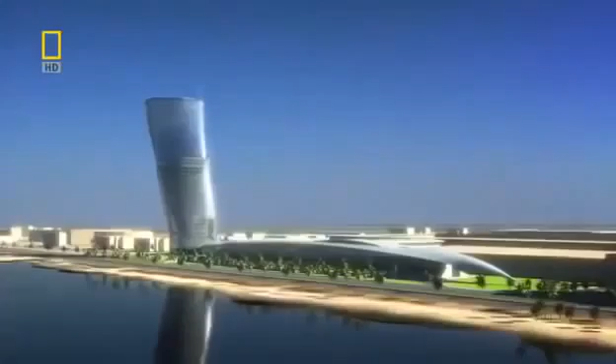The team come up with an extraordinary design. A tower that spirals out of the ground to 160 meters. Inspired by a desert whirlwind and the splash of a wave rising over the sand. This gravity-defying skyscraper tilts almost 5 times more than Italy's Leaning Tower of Pisa. No single angle of this tower is the same as another. It's a structure guaranteed to amaze.

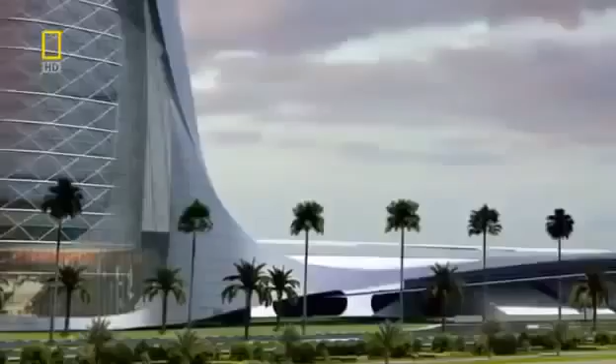We really wanted this to happen. They could see a vision suddenly. They could see something that would stand for them. Then there was no stopping us. Sheikh Sultan wants the lower floors to become the most prestigious office address in Abu Dhabi, with the top 18 levels assigned as a 5-star hotel fit for royalty.

But for maximum impact, this landmark skyscraper also needs a prestigious location. The Sheikh decides the tower will stand next to a monument of national importance, the Grandstand. Built by his uncle and founding father of the United Arab Emirates, Sheikh Zayed, it's used to this day for national celebrations. This monument and the skyscraper will link Abu Dhabi's future with its past.

Over the past 50 years, this land has experienced extreme change like no other. The discovery of huge oil reserves in 1958 set the wheels of progress in motion. Abu Dhabi's ruler, Sheikh Zayed, had a vision. To unify the sheikhdoms and secure their financial future from Western dominance. He then set about using his black gold to create a city that rose out of the desert.

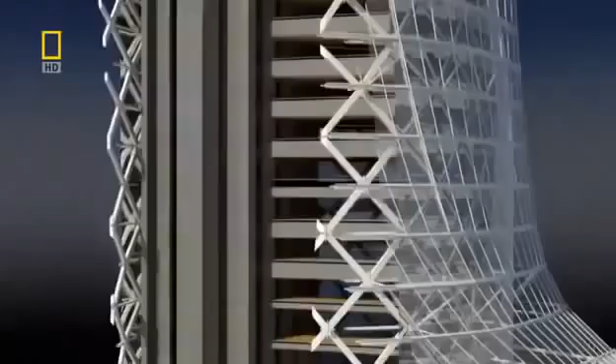To make Capital Gate's gravity-defying design a reality, it'll take some extraordinary engineering, and the challenge begins on day one. Its top floors overhang its base by 33 meters, creating huge forces that want to rip the building's foundations out of the ground.

At the construction site, project architect Tony Archibald is daunted by the task ahead. When I first joined the job, I was shown the drawings, and I kind of did a double take, and I wasn't quite sure that I got the correct understanding of the project, and it took me a few moments before I realized what we were about to undertake.

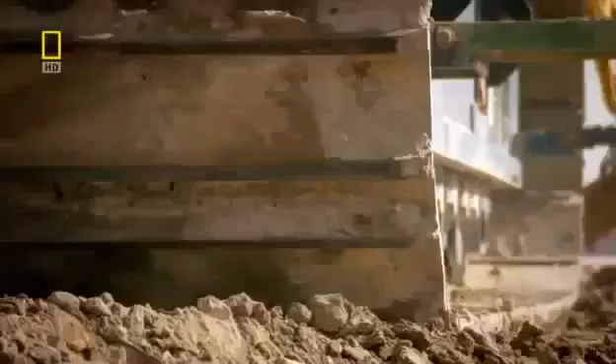Keeping Capital Gate upright is a huge engineering challenge. There isn't just one solution. To overcome the forces of gravity, it will take a whole range of pioneering techniques. But the task starts with the foundations, deep underground. On one side of the building, the weight is going down into the ground. On the other side, it's being lifted out of the ground. And that's due to the large overhang that we're having to deal with.

The solution requires almost 400 concrete piles that work in two different ways. On the leaning side, half of the piles push the overhang's forces into the ground. On the opposite side, the remaining piles anchor deeper into the bedrock. They resist the stretching forces trying to wrench the building out of the ground.

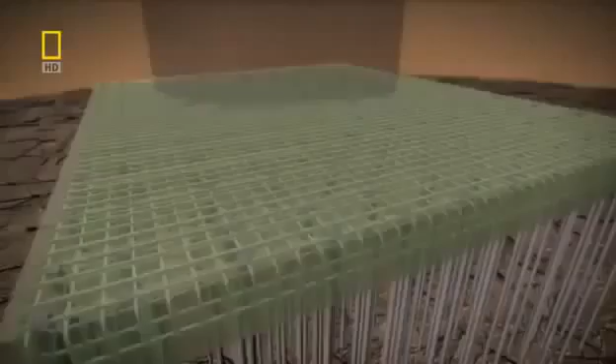Finally, to evenly distribute Capital Gate's forces into the piles, a deep concrete slab reinforced with steel is laid on top. What the foundations taught us is that every single aspect of this building has to be custom engineered.

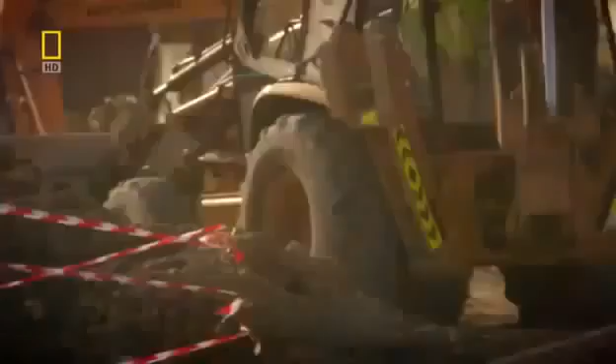Excavators dig out a colossal 6,000 cubic meters of sand. And over 8 weeks, hundreds of piles are driven into the ground. We had an awful lot of piles to put in very close proximity. It was a real difficult challenge. There can be no let-up on this schedule. Sheikh Sultan wants Capital Gate complete by an impossibly tight deadline.

In less than 2 years' time, Abu Dhabi will host the World Future Energy Summit. Over 3,000 delegates from 50 countries and the world's press will convene at the neighboring Abu Dhabi National Exhibition Centre. It's the perfect opportunity to showcase Capital Gate and prove Abu Dhabi is at the forefront of innovation.

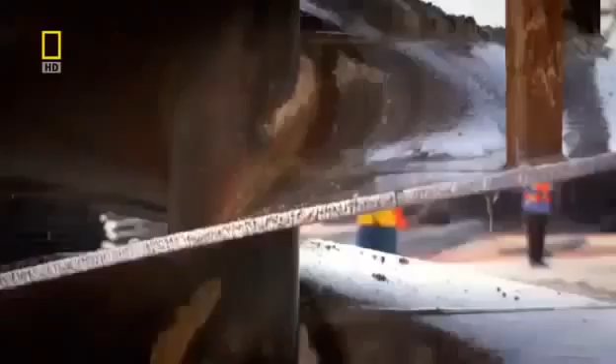But this gives the team just 24 months to design and build a unique skyscraper. With the foundations finished, building above ground can begin. But because of the dramatic lean, it will have to be constructed in a very different way to a conventional skyscraper. We realized once we'd done the foundations that this was going to be the first of many difficult problems.

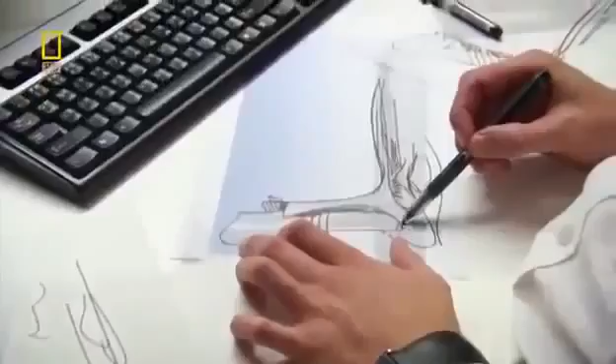A normal skyscraper requires a solid core to hold it upright. But Capital Gate's curves would just crack and topple a standard core. Engineers must discard conventional thinking and devise a way to defy gravity. Inspired by the nearby desert landscape and its wind-shaped dunes, architects have designed a curved leaning tower. But it'll take some audacious engineering to stop Capital Gate from falling over.

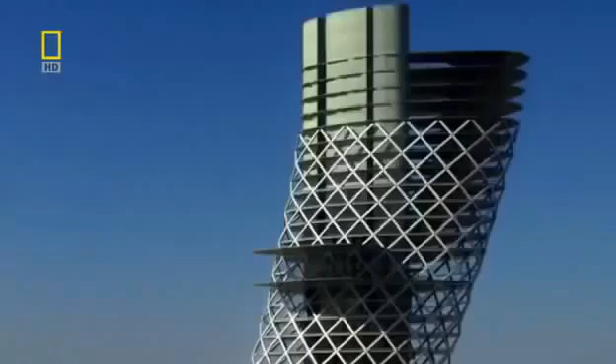Normal skyscrapers are built around a slim vertical core, which helps to channel the building's weight into the ground. There's so much overhang on this building that a conventional core was no way going to work. You just can't build a straight core. It's just not strong enough. Capital Gate's design would cause a conventional core to bend dangerously. The pull of the massive overhang wants to stretch the core on one side, causing the concrete to tear apart.

Structural engineer Mona Vassi knows it's a serious problem that must be solved. When I saw this one, I thought it's impossible, it's not going to work. It's just some sketch somebody left somewhere. But I always think that for the architects, it's easier for them to just draw something, but it's not easy for us to fulfill or satisfy their needs.

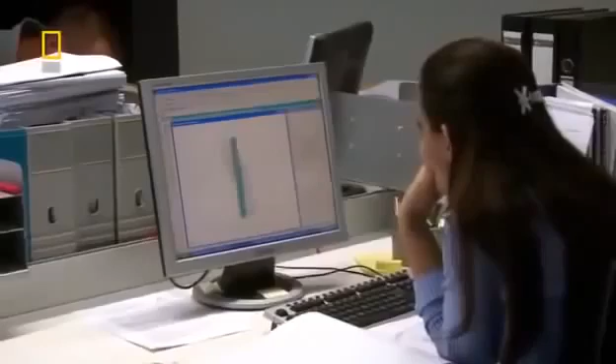The engineers developed two groundbreaking solutions. The first part of their plan is to build the core with a curve, bending in the opposite direction to the building's lean. As the structure grows, its weight pulls the core straight. In total, it shifts 350 millimeters, and the effect is significant. The concrete that would have been stretched by the overhang's pull will now be compressed and strengthened.

You build it bent, and then as you add the slabs to the upper levels, it pulls it back into vertical. So basically that whole vertical core is in compression, and that gives it immense strength.

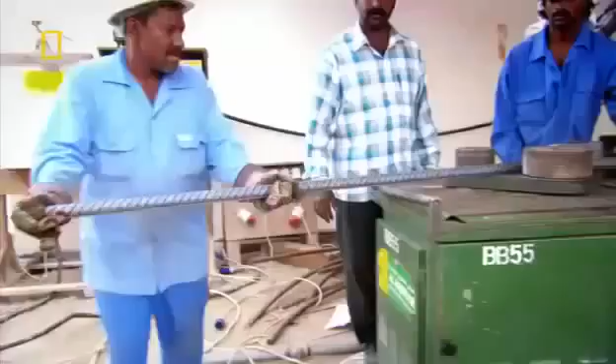The core grows 4 meters a week, and construction manager Les Fairchild is in charge of building it. This is probably the most complex core that I've come across. It's built at an angle, and effectively the core holds the whole building up. The core is built using a technique called jump forming.

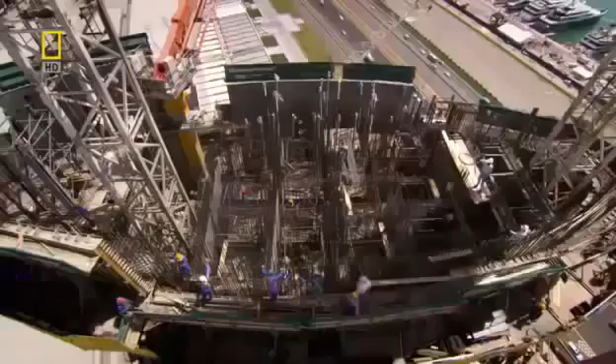First, a dense mesh of steel reinforcement is assembled. A mold then closes around the steel to form the shape of the core. The steel mesh is then filled with concrete. Then the mold or form can climb up the core wall for the process to start all over again. Jump form is a hydraulic platform. Once we've cast each 4-metre level, we simply attach it to some runners and we jump it hydraulically up to the next level.

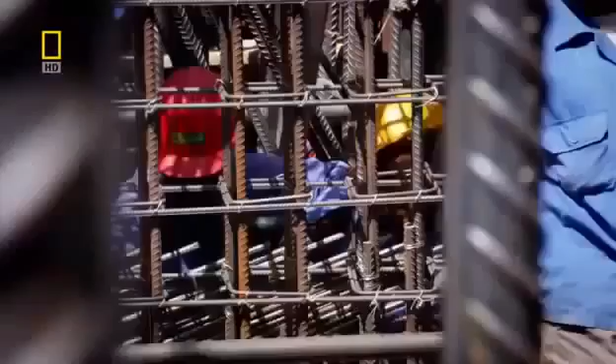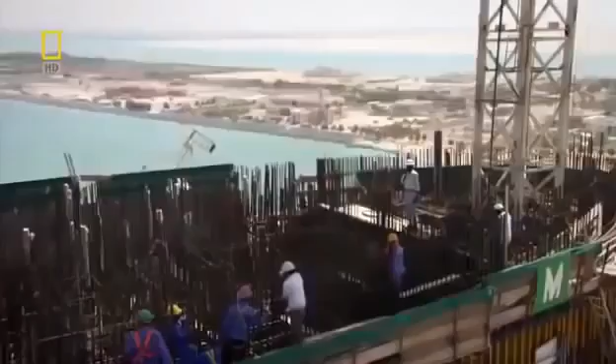The core will be strengthened as it straightens. But for the core to carry extreme loads, the concrete must be reinforced using steel rods called rebar. The rebar is installed during the daytime, but temperatures of up to 50 degrees Celsius and concrete don't mix. It dries too fast and could crack. To set at the right speed, the concrete has to be poured during the cool of the night.

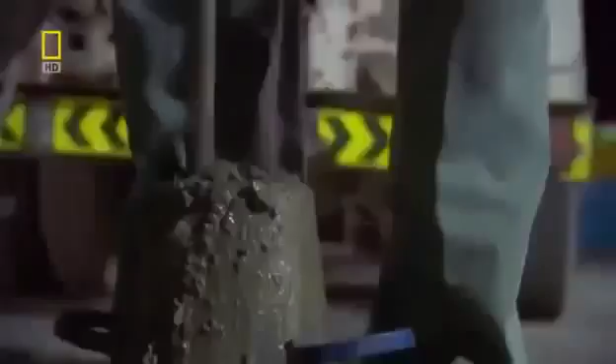As the core grows higher, the liquid concrete has to be pumped over longer and longer distances. So the consistency of every batch is first checked in a slump test to ensure it won't block the pipes. When you first see it coming out the wagon, you can usually tell whether it's a tight mix or whether it's a loose mix, and that's what we're testing for really in the slump test. We simply make a cone, lift the cone off, and depending on how much it reduces in height, tells you exactly what the slump is. The one we just witnessed is 215 millimetres, which is within the specification, so that's good to go.

Whilst the truck drives to the pump, Fairchild needs to get onto the core. He can take the stairs, but 90 meters up is a long climb. He knows a much faster way. Crane lift.

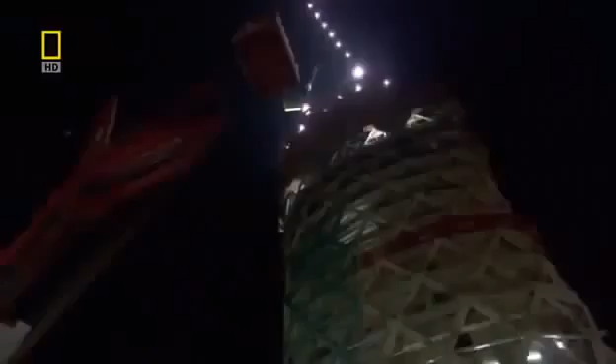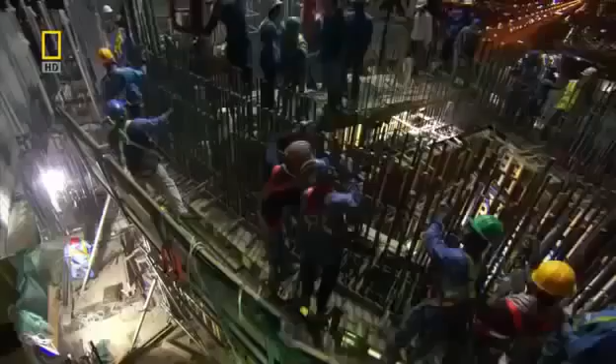It's going fairly well. We've had a nice continuous supply of concrete, and we're now pumping it up to the upper levels of the building. And the lads are just steadily working away. They actually work from one side to the other in metre deep layers, so they're doing everything right. It's always exciting when we pour concrete. It means it's another achievement really. We're going up another level.

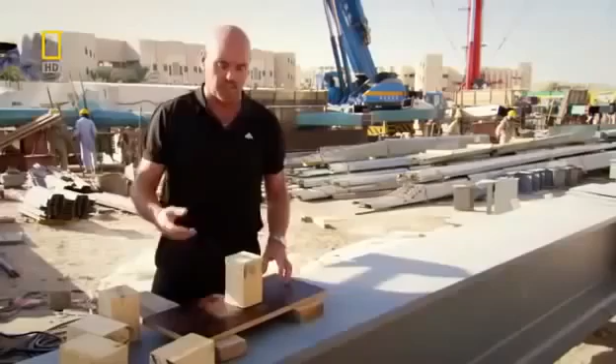But building the core out of alignment and packing it with rebar still isn't enough to stop gravity toppling Capital Gate. What we came up with is a post-tensioning solution where we introduced much more reinforcement into the core wall and then used the tensioning process. Basically that was done by introducing high tensile strands to the centre of the walls.

When we reach the designated height, we simply apply tension. We're actually stretching the tendons that fall through the wall, and we're actually pulling them tight, and that's done by a tensioning machine. So effectively when the tension is complete, when the load was applied, the core would stay intact, and the additional reinforcement would prevent it from falling over.

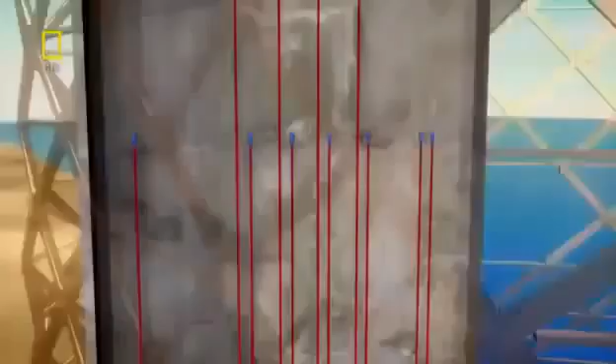To post-tension the core, 146 steel tendons are threaded vertically through the concrete. Each tendon is 20 meters long and runs through 5 floors of the building, overlapping each other for maximum strength. When the tendons are stretched, the stress counteracts the pulling force created by the massive overhang, stopping the concrete from tearing apart.

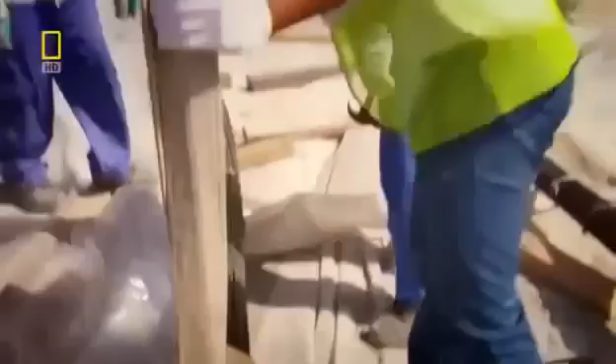On site, the team are post-tensioning the core, but no one has ever attempted this vertically in a skyscraper. The long tendon is lifted to the top of the core. The team used the steel tendon's weight to force it through a duct already cast through the core. Once the tendon is in position, the team lock off both ends, ready to tension its individual strands.

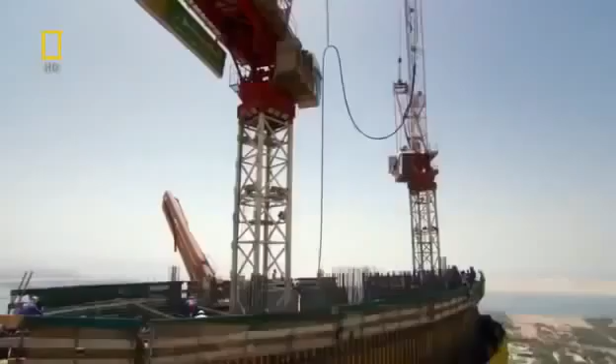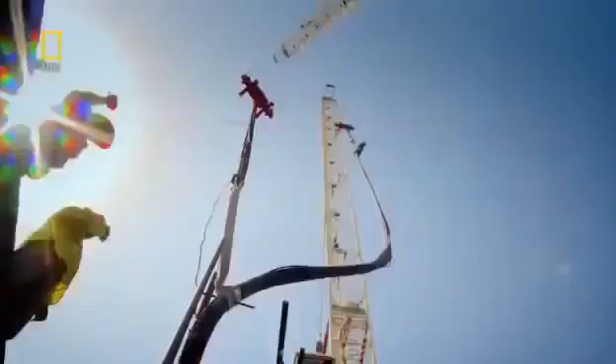A pneumatic jack clamps around one strand at a time and stretches it. It's equivalent to about 5 family cars pulling on one end of the rope. With the steel tendon now stretched to the right stress level, concrete pouring can continue upwards. The quantity of cable that's been used is approximately 120 tons and 120,000 metres in length. It's about 44 times the Golden Gate Bridge. This process is repeated over and over and means the core should withstand the huge loads generated by Capital Gate's extreme overhang.

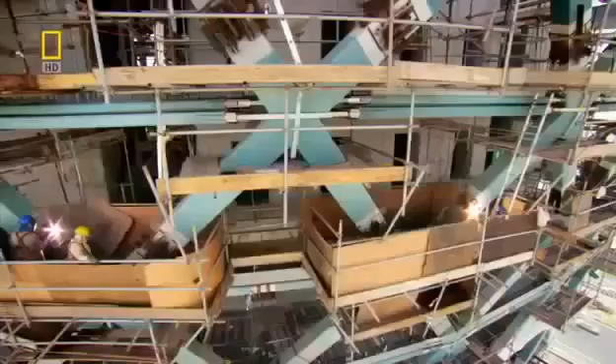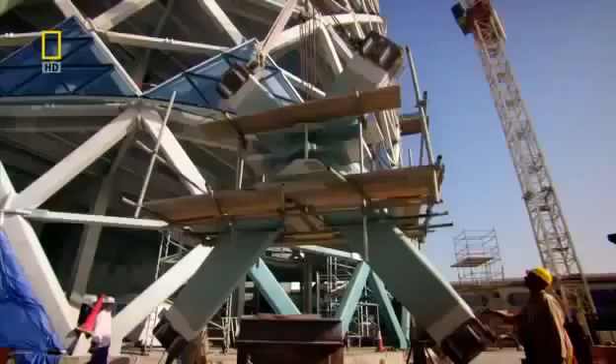But now, an even greater challenge must be tackled. The building's twisting, leaning design must somehow be turned from theory into reality. And once again, it'll mean bending the rules of architecture. To create Abu Dhabi's architectural icon, Capital Gate needs an exterior curved leaning frame. But once again, the building's extreme tilt creates a problem.

The shape of the building with this very pronounced overhang meant that traditional skyscraper building solutions just weren't going to work. There's no way. The building design requires it to be thin to maximize floor space and allow for huge panoramic windows. Irfan Ahmed is one of the engineers who has to find a solution. For structural engineers, it's always challenging to accept the architectural requirement, you know. They always want thinner and thinner and thinner.

Surprisingly, the humble chicken could help with this engineering dilemma. It is essentially a skin of structure around the outside of the building, not unlike an egg. An egg can withstand huge loads because it evenly distributes forces down through its shell, which means the shell can be thin, creating more space inside. So it's very, very thin, it's very, very strong. If I try to crush this egg, you can see that it's actually amazingly resilient. So let's see how resilient.

Here I have 170 eggs laid out, and we're going to put load on top of these in the form of breeze blocks. Moment of truth. So far, so good. Each one of these blocks weighs 15 kilos. So we've nearly got half the weight of a car on here now, on our 170 eggs. Let's see how far we can push this.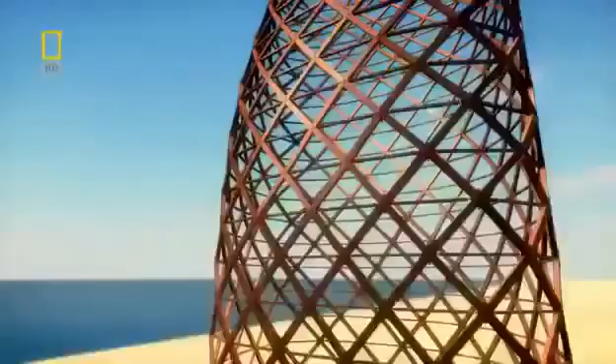A diagrid is a giant mesh of steel that wraps around the core. Steel beams connect to a node or joint to form a cruciform section. 720 uniquely shaped sections link together to form the thin but immensely strong diagrid. Working together, these cruciforms equally distribute the forces down the outside of the building. The way it does that is by making a uniform net, so that the forces are very evenly distributed, and that means that we can get away with slenderer sections.

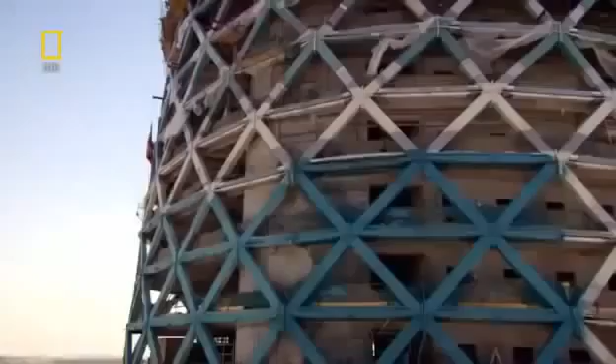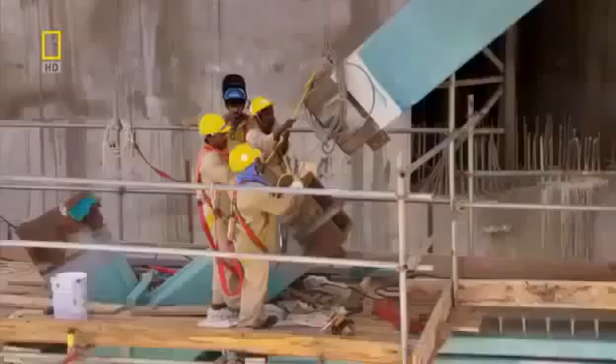On site, a team of 240 steel fabricators assemble the diagrid. They've built the easier straight part of Capital Gate's base, but now the structure is starting to lean, making installation even more challenging. Each cruciform, weighing up to 16 tons, has a unique geometry and must be crane lifted at a precise angle. If the diagrid is not assembled with millimeter accuracy, the mesh will not channel the loads and the structure could be weakened.

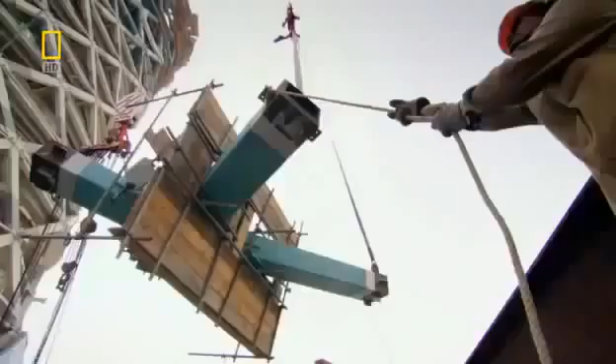The engineers must communicate closely with the expert steel fabricators. They design and manufacture the diagrid 150 kilometers away in the neighboring emirate, Sharjah. Here, cutting-edge construction is the norm. They've built one of Malaysia's Petronas Towers and Dubai's iconic skyscrapers, the Burj Al Arab and the Burj Khalifa. But Capital Gate's revolutionary design pushes even these experts to the limit.

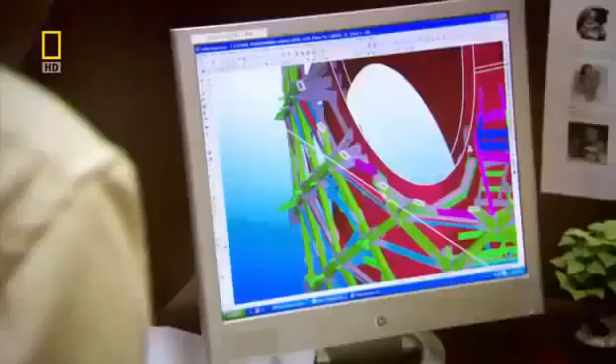On the planning floor, project engineer P. Bhaskaran and his team need bespoke 3D software to tackle the building's highly complex diagrid. The 3D modeling is done, and any unforeseen criticalities will be very clearly identified in the 3D model. Each one of the 720 cruciforms is precision engineered, not only to channel huge forces, but to connect with millimeter accuracy to the neighboring cruciforms and the glass facade.

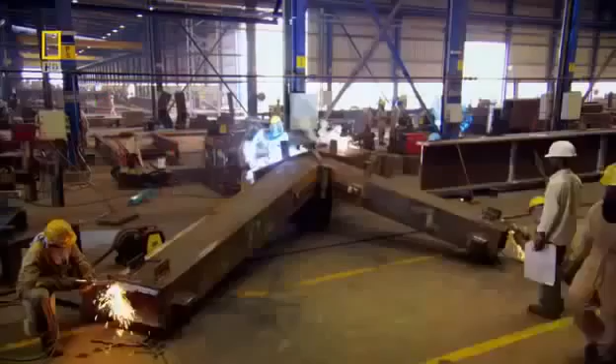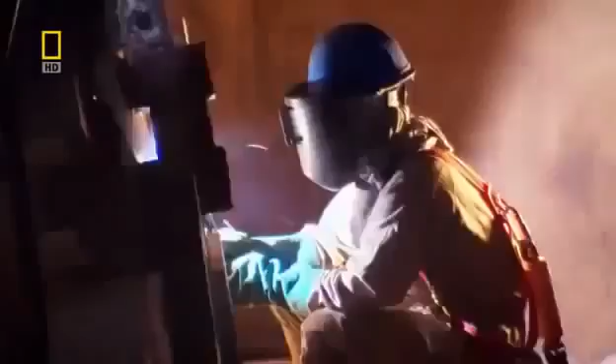But to measure their exact angles, the team used some old school technology, chalk. It might look unsophisticated, but it's highly accurate, ensuring all the elements will join together. To keep up with construction, the factory must produce 18 cruciforms every week. Constructing such a huge building, a critical building within the short span, without working 24 hours, it is absolutely not going to happen. As the skyscraper reaches new heights, the long hours start to pay off.

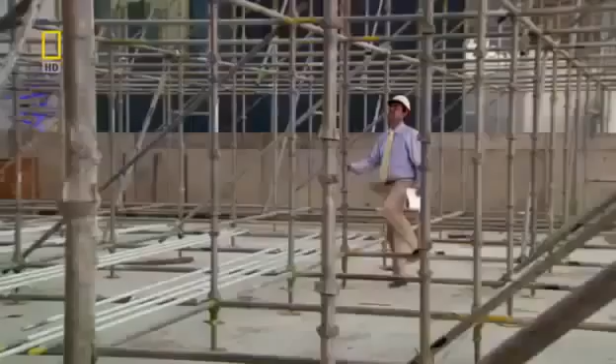This design pushes the diagrid technology to its absolute limit, and in fact far beyond what's ever been achieved so far. Even in your dreams, you're thinking about this project. So once you see the structure coming up, you forget all the long hours you spend and all the sleepless nights. A colossus is fast emerging from the Abu Dhabi sands. Now, this leaning tower must be clad with a glass facade. And as always with this gravity-defying structure, it's going to require some revolutionary engineering.

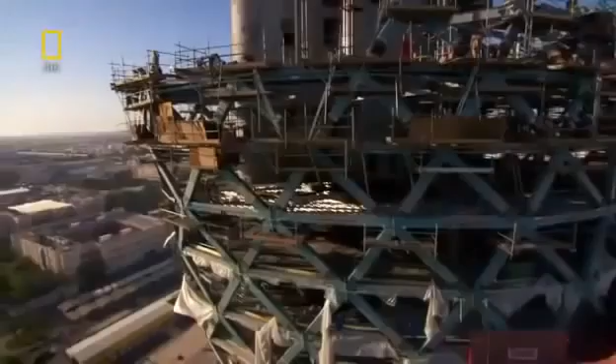Glazing Capital Gate's leaning curved frame is a major problem. Covering its unusual contours with curved glass will blow the budget. So the skyscraper's curves must somehow be clad using cost-effective flat glass panes. Fortunately, ancient Greek geometry can help.

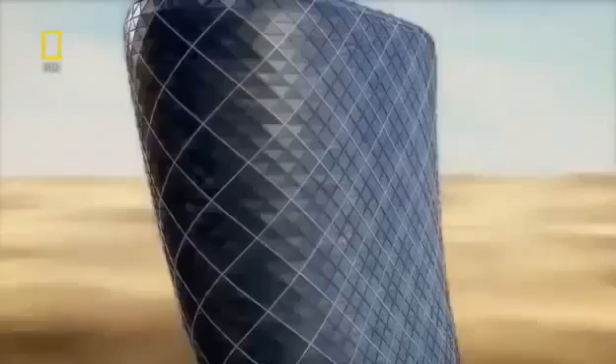Because you've got a complex shape, it's an organic shape, it's a curved shape, the only way to model that with straight lines is to use triangles. Triangular panes can pivot in 3 directions, and when joined together can cover complex geometric surfaces. But because every angle of the building is unique, it'll take 26,000 triangular panes to form the facade.

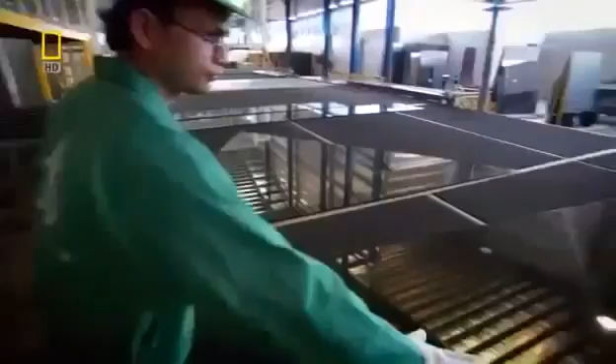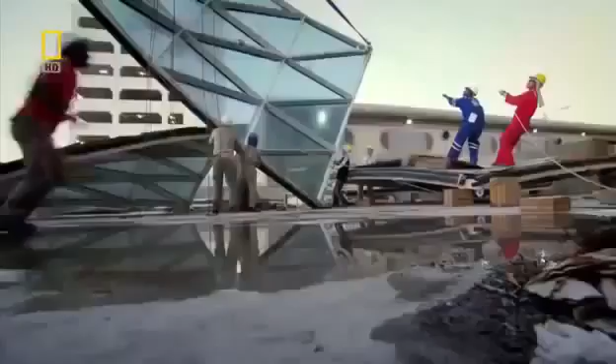With so many glass triangles to cut, the local glass factory springs into action. Each pane is scored by an automated diamond cutter to an exact pattern. The triangles are then sent along the production line. The team is under constant pressure to deliver enough glass to the site. Hey, this side, you guys, hold it. After several weeks, 8 diamonds are in place and another 100 standing by.

But the glass design is so unconventional, it still has to pass a number of tests to prove it's up to the job. Because we'd already started the glass installation, the results of this test were absolutely key. Each panel is stacked one upon the other. So if we'd had any kind of problem, we would have had to unstack them, which would have had disastrous consequences for the program.

This is no ordinary glass skin after all. Capital Gate's core straightens as it grows. The skyscraper will not stop moving until after completion. Normal glass facades can accommodate minute movements caused by wind and temperature changes. But to stop the glass shattering and keep the building watertight, the panels must be designed to shift by up to 20 millimeters. The scale of that kind of movement is almost unheard of in glazing systems. It's a vast amount of movement.

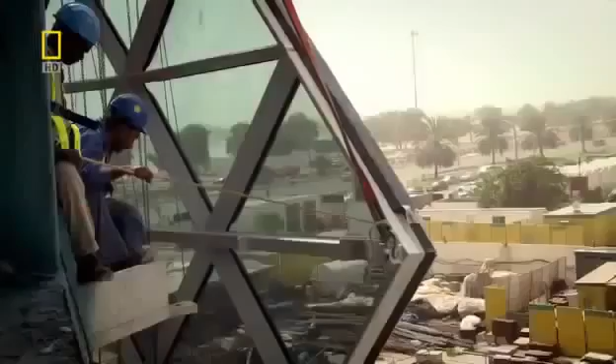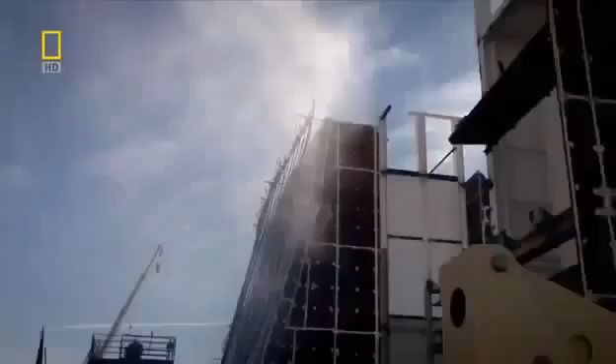With glass installation ongoing, construction manager Craig Rooney needs to know the panels will perform. We don't want to get to the top, we've done it, we've installed it, we think we've done a great job, and then it all leaks. The panels must be tested to the limit at a Dubai laboratory. A plane engine and many litres of water simulate worst-case scenario weather. Now the moment of truth. Any leaks could be a disaster.

And it's bad news. The first time we got a full water test, we had a leak. The fact that we had a leak was devastating to the whole team and very alarming. The diamonds connect to each other by a bespoke two-layer seal. The flexible spongy seal allows the diamonds to move and keeps water out. But if any water does seep through the outer seal, drainage tubes fitted at intervals let the water flow away.

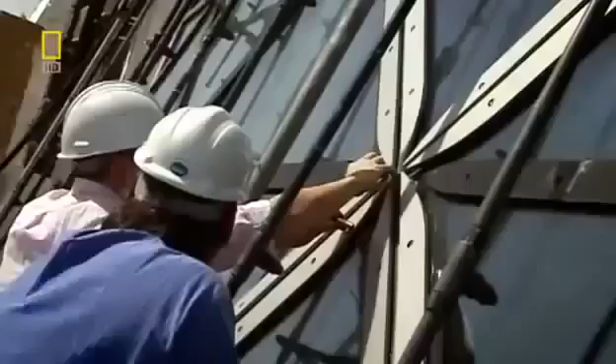The panel has failed the test. Water has flooded inside and penetrated the inner seal. If it was a fundamental failure, we're back to the drawing board, so the cost and the budget and the program all go completely out the window. The panel is examined. Answers are needed fast. Fortunately, it's not a design failure. They discover a drainage tube is only blocked with sand. The problem resolved, installation can step up a gear.

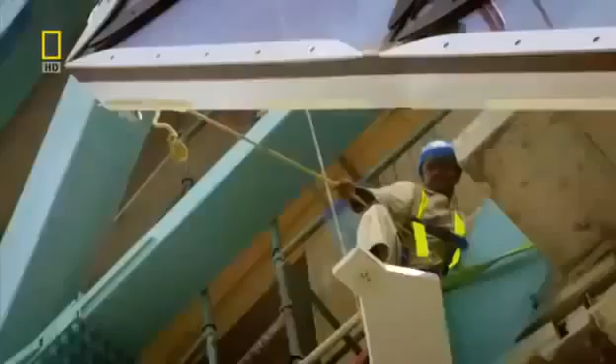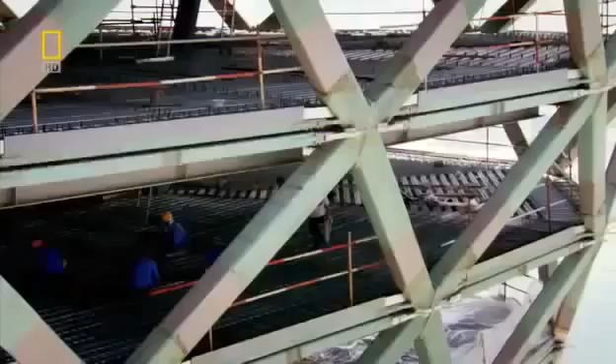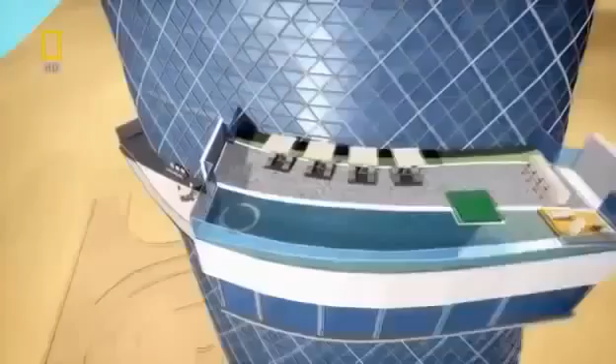But as always with this audacious building, one problem is solved and another is just around the corner. To give Capital Gate's five-star hotel lobby the wow factor, architects again plan to push the design to the extreme. Now they want to build an infinity pool and a restaurant, hanging 100 meters above the ground.

18 months into the build, Capital Gate's design is about to give a new slant on high-rise living. The architects want a pool deck and restaurant suspended in the sky, but it's an engineering headache. There's so many requirements that architects have that really put us in so much trouble as engineers, but you want to make sure you have a safe structure. The design calls for a two-story extension, hanging without any visible support. But the pool's water alone will weigh 150 tons.

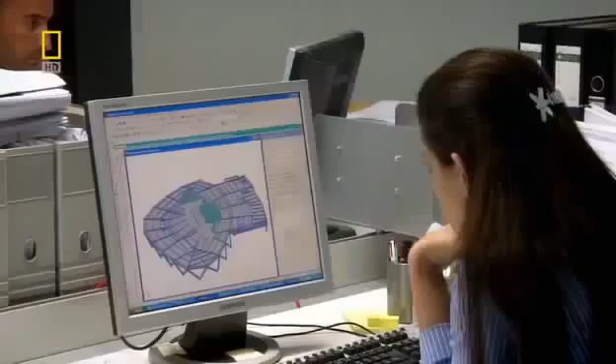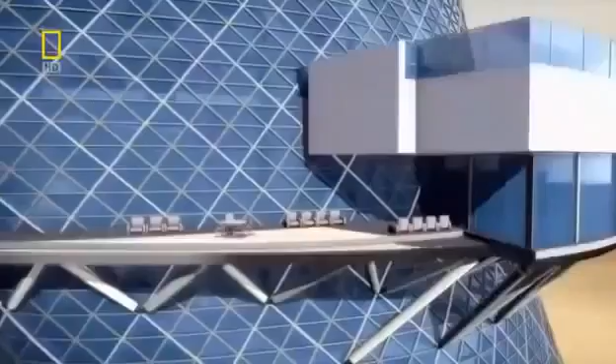The structure's huge mass means it needs reinforcement. We needed some supports from below, otherwise there was no other solution. I don't think you can have a cantilever that huge on this building, no way. The design will only work if it's underpinned with 22 steel struts. They will carry the loads back into the building. But the struts must also look delicate to meet the architect's aesthetic demands.

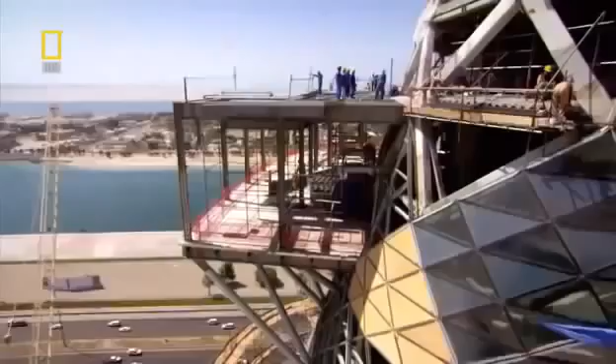On the construction site, 90 meters up, the pool and restaurant is taking shape. All of its structural elements are in position, except one. The team are raising its last 6-ton floor beam.

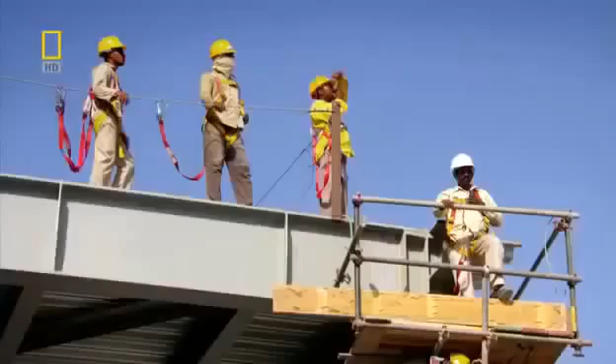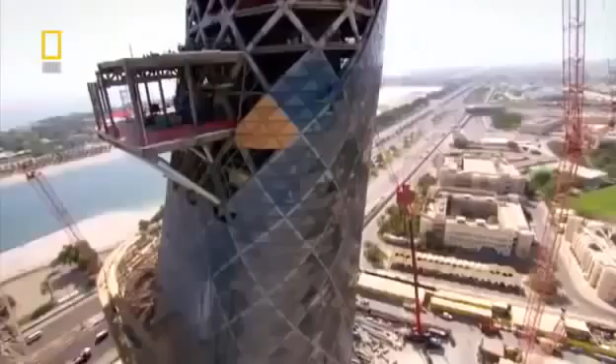The idea behind these junctions is that they behave like the insects that can walk on water. They're sufficiently light that the surface tension keeps them above the water. So these little brackets dissipate the forces from all that weight.

Capital Gate is fast becoming an Abu Dhabi landmark. But the taller it gets, the more the weight of its upper floors is a problem. The skyscraper needs to go on a diet. And this time, the architects come up with a clever solution.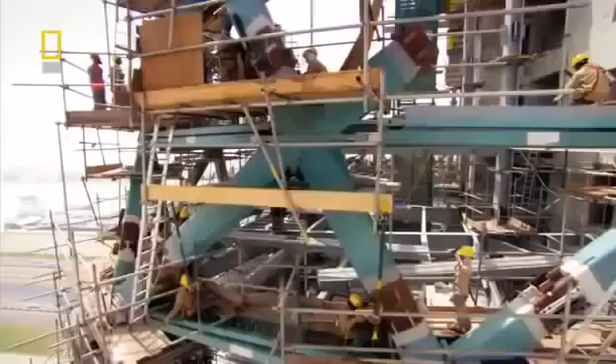The building has lots of visual surprises. And one of the most important ones of those is the internal atrium. It's a kind of a light well that brings light from the sky deep inside the building, and it extends over half the height of the building. So it starts out very, very small at the bottom and opens out in a big funnel.

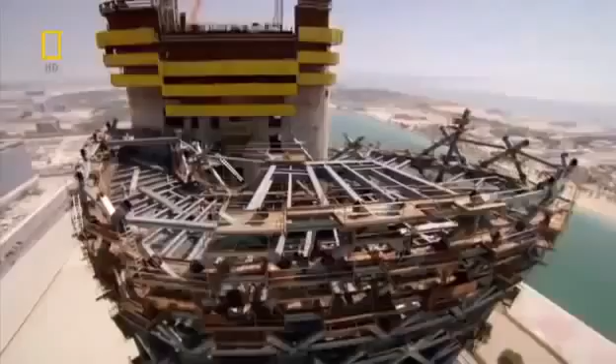This cavernous hole is good news for reducing weight and minimizes forces. But the atrium is a double-edged sword. The floors are critical in transferring loads from the diagrid to the core. A giant hole through 18 floors means these loads must find another pathway. It's a very, very big hole in every single floor plate. So our engineers really had their work cut out.

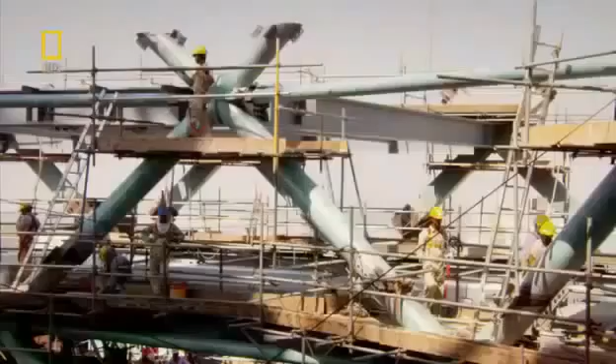You don't want to have an opening in your floor. You want to have more concrete, reinforced concrete, to transfer these forces. The forces need to flow away. And the solution is pioneering. An internal web of steel mirroring the external diagrid. This is the first time we've ever heard of this being done.

The internal diagrid is actually a fundamental part of the structure. This funnel-shaped internal skeleton carries the forces of an 18-story building down to its tapered base and into the core. But the loads are extremely high for such a small area. To stop the atrium punching through the core wall, the concrete needs protection.

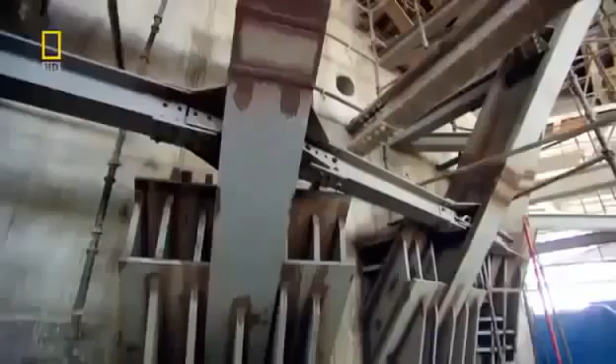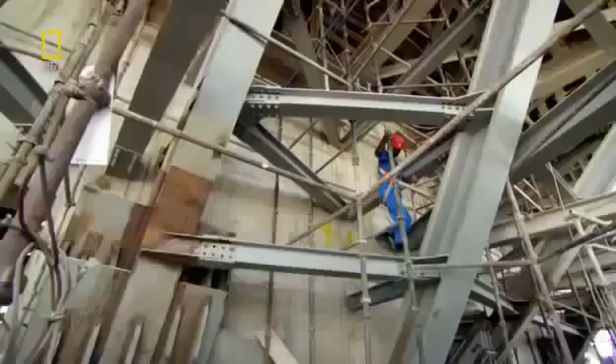The answer? Six giant plates of steel that brace the connection to the core wall. The connections are really a wonderful, wonderful piece of engineering. They're 8 meters high. They span 2 floors, and they connect back into the core. The atrium's near completion brings Abu Dhabi one step closer to achieving an iconic landmark. But as the sun goes down, this isn't the only celebration underway.

On site, the Indian steel team are holding an annual blessing to the Hindu god Lord Vishwakarma, the protector of architects and engineers. Their livelihoods depend on staying safe, and although they use safety equipment and are highly skilled, working with huge sections of steel at height is never risk-free. We pay our respect to God and get the blessings from the God. We do that for the safety of all our workers and for the proper completion of the job.

Every trade of workers we take, the basic tools they are using on site, that has to be just kept in front of God, and the workers, they feel themselves that they are in safe hands. The tools are now blessed, and the steel team's morale is high.

But the glass installers, lifting diamonds to over a height of 100 meters, are getting the wrong kind of lift from Abu Dhabi's highly unpredictable wind. If the wind is too strong, then you can feel this in your hands when you hold these diamonds by rope. I always get nervous if I see the panel starting turning. And this makes me always a little bit afraid when I see diamonds going up and starting moving.

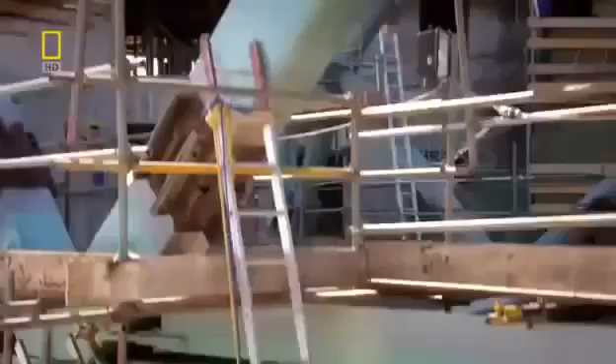Integrating what will be Abu Dhabi's highest helipad atop one of the world's most daring skyscrapers at first seems a simple request. But it actually poses 2 serious problems. It'll create new forces that must be absorbed by the already strained core, and unpredictable wind flows that can cause potentially lethal flying conditions. You get a thing called wind shear, tipping the whole helicopter onto its side, and this is a very real and very dangerous risk.

These rapid wind changes, known as wind shear, can affect the lift on helicopter blades. Aircraft can be blown off course, or literally fall out of the sky. There is no way that we could have any margin of error on the safety. The only way we could predict what the wind shear would be like on the top of the building was to model it in a wind tunnel.

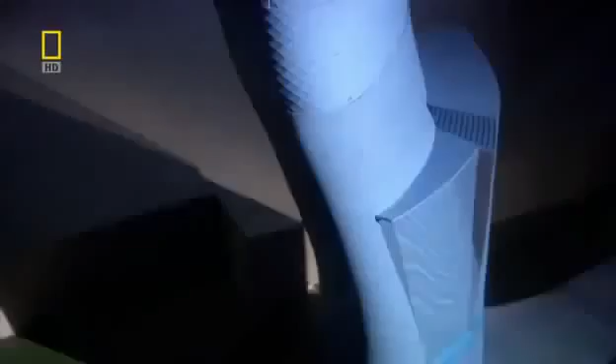In London, England, a scale model of Capital Gate is put through its paces in a high-tech wind tunnel. Just as the team fear, within seconds, wind shear conditions appear. Air currents are flowing over the top of the building, but then separate from the surface, spiraling inward to form a realm of turbulence. Wind engineer Leighton Aurelius knows the consequences could be serious. If the pilots lose control in this random ball of energy here, they may in fact end up crashing onto the helideck, or even worse, onto the tower itself. make sure that can't occur.

But that's not all the wind tunnel test reveals. Wind impacting the helipad is also creating huge suction forces. We're talking about very large forces here wanting to pull the helipad off the top of the building. Something in the realm of several large trucks or big rigs trying to pull this helipad away.

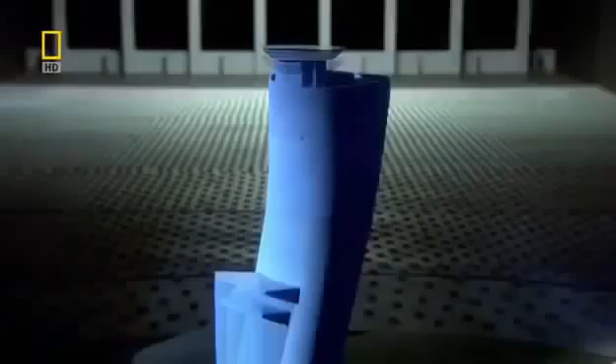To make the helipad safe, Aurelius and his team have to go against conventional thinking. We didn't think that lowering the helipad was actually going to be the optimum design, but we see reduced loading on the helipad as well as safer conditions for the pilots to land in. Lowering the helideck to just 2 meters above the roof dramatically decreases the wind shear threat, and means Capital Gate's core will withstand the additional loads.

We're relieved, frankly. The tests have actually confirmed now that we can have it in our original design position, which is very low, which will mean that the profile on the skyline is exactly where we want it. But it'll take another 5 months just to draw up the helipad's blueprints, and a crane must be left behind to build it.

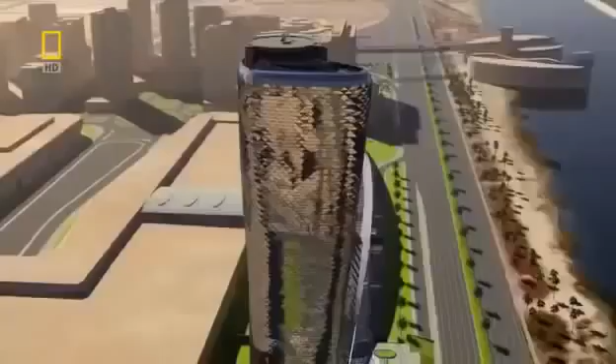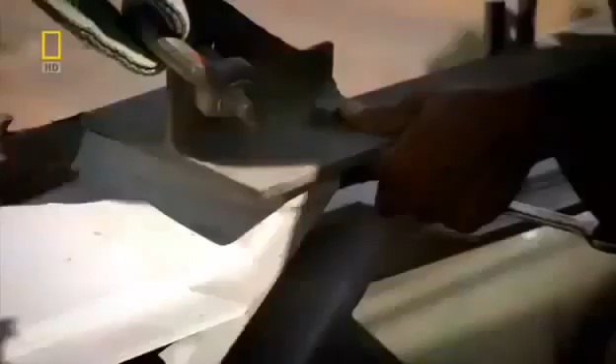Now, with only weeks to go until zero hour, the team are installing one of the last glass panels. It's a moment that once seemed a long way off. In my office I have a plan of all the diamonds we have to install, and in the beginning it looked like I'm in jail and I'm marking the wall with marks for each day. And so at first I felt I will never finish this project. Just 10 months since the first diamond was fitted, the facade now shimmers in the sun.

Capital Gate's internal fit-out will take another year. Only then will its 5-star hotel and Abu Dhabi's most unusual office address be open for business. But against the odds, the team have created one of the most extraordinary megastructures on the planet. Capital Gate twists and spirals out of the ground, soaring to a full 162 meters. It's taken nearly 6 million man-hours to construct, and its overhang is spectacular.

You see the building and you stand underneath the overhang. It's extremely impressive. It's a fantastic feat of engineering. I feel as though I've been here an eternity, but it's probably been the quickest 2 years of my life. It's been an amazing journey and we've learned so much. And actually I think we've demonstrated that some things that looked impossible or even ridiculous were actually possible.

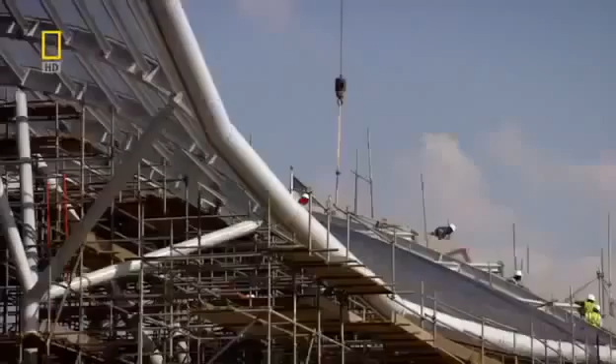And Abu Dhabi's past will soon be physically linked to its future by a wave of steel that'll rise over the grandstand and splash up the skyscraper's mirrored glass. Abu Dhabi is a fascinating part of the world to be at the moment. It says to people we can step outside of the box. We don't have to follow the rules.

With the 2010 World Future Energy Summit just weeks away, Sheikh Sultan can be sure Capital Gate will show the world what Abu Dhabi is capable of. This building is really iconic. It catches the spirit of Abu Dhabi and will be part of the postcard image of Abu Dhabi. The team have achieved what some thought was impossible. A leaning tower that claims the world record for the most inclined skyscraper on Earth.